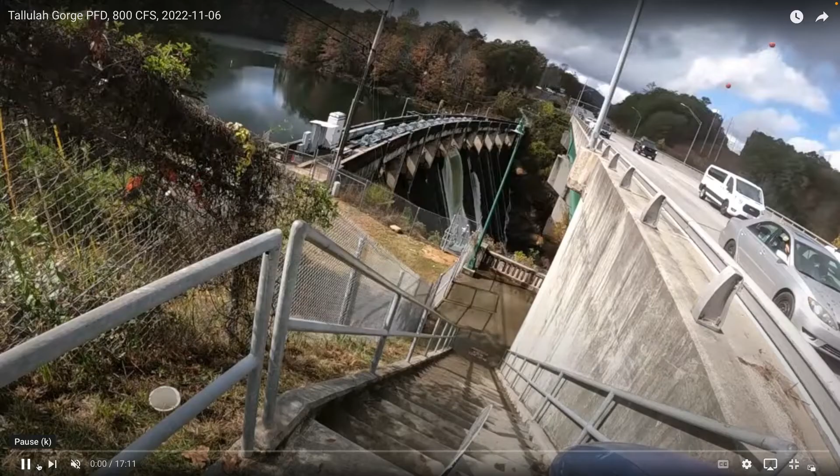If you're on the face of a wave, the water's coming downstream past you. You're sitting on the surface of a wave, pointing down the wave, and the wave is flowing past you - that's the same as the friction on the bottom of the boat, like if you're skiing. Your weight vector is directed down the face of the wave.

The water in this case is moving instead of a static mountain that you're snowboarding down, and it's providing that force against you. If you're not moving physically relative to space, there's no air resistance as there is for skiing, but those are the forces that are balancing.

So as I say, open channel flow is not so relevant for the things that we do in the 4 programs represented here: mining, petroleum, energy, and environmental systems engineering. Certainly external flows in week 12 and pipe flows are by far the most relevant to what we do, both for pipes as in drill holes and also as in porous media capillaries, representing that.

So anyway, that's where we are. I can't see my cursor.

And so the final one to show is, I guess it's standing wave, hydraulic jump.

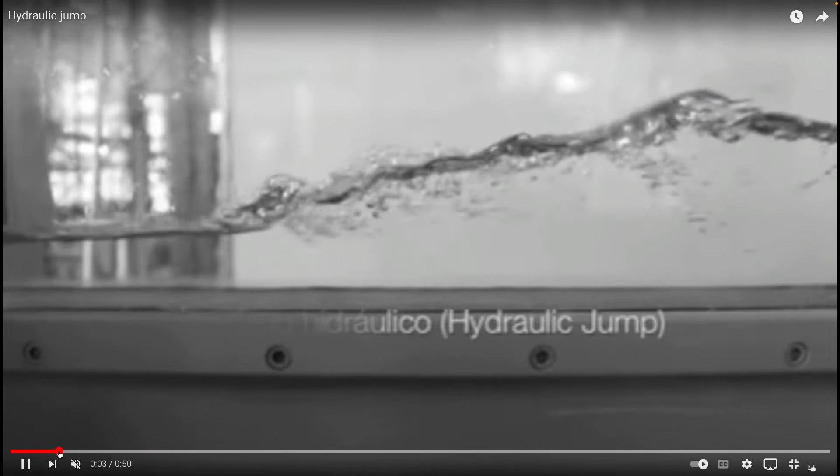So that's kind of the view of what we'll deal with in this class for this last week, which we are together for.

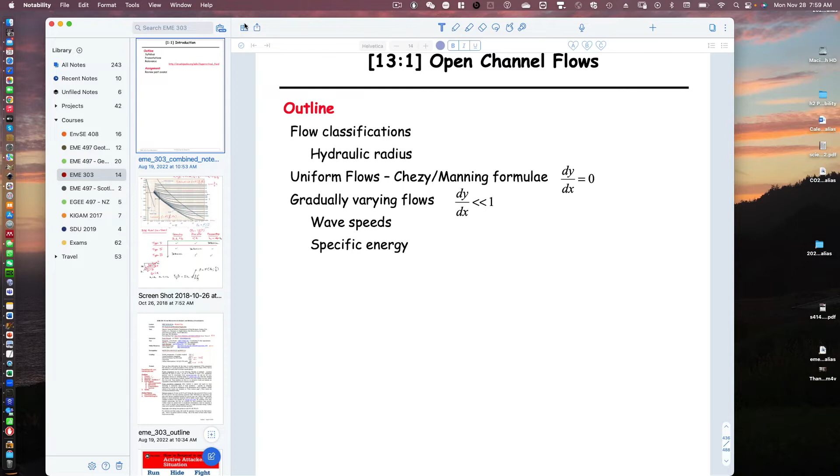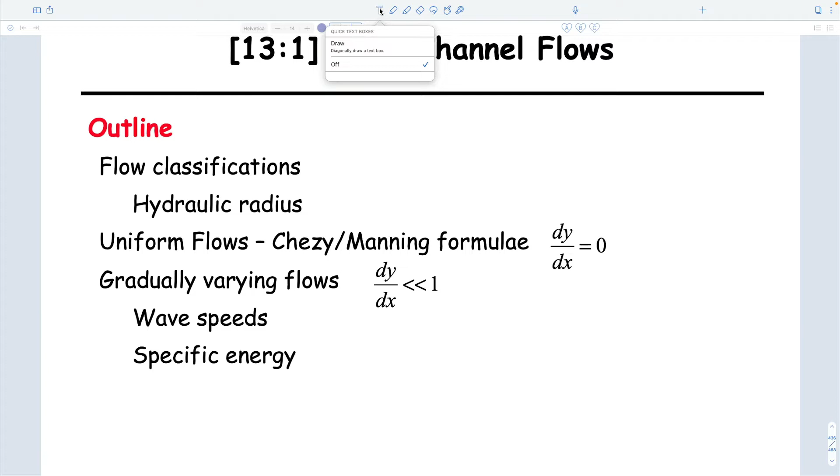So I'll go to this, and I'll go to this. I guess I have to get used to doing this again. Oh, I didn't want to do that. Okay, yeah, I thought it was me. Greetings.

So made the case that we're talking about open channel flows. We've talked about flow classifications. We made the case that it can either flow very placidly, like the rivers we're used to around here, where the cross-section area flow doesn't change much as we go downstream, or it can go in these so-called gradually varying or rapidly varying flows that we just saw for the hydraulic jump. So we'll talk a little about flow classifications.

We'll define hydraulic radius to supplement what we already know about hydraulic diameter. And today we'll really only talk about uniform flows. Uniform flows are the kinds of flows we get if there's no difference in cross-section between upstream and downstream. Then we'll move on to talk about more complicated cases.

We won't talk about that today. We'll talk about flows where the cross-section does vary between upstream and downstream.

I was sitting on my own at 7:45 before the first couple of guys turned up. So thanks for coming out as we roll these things up again.

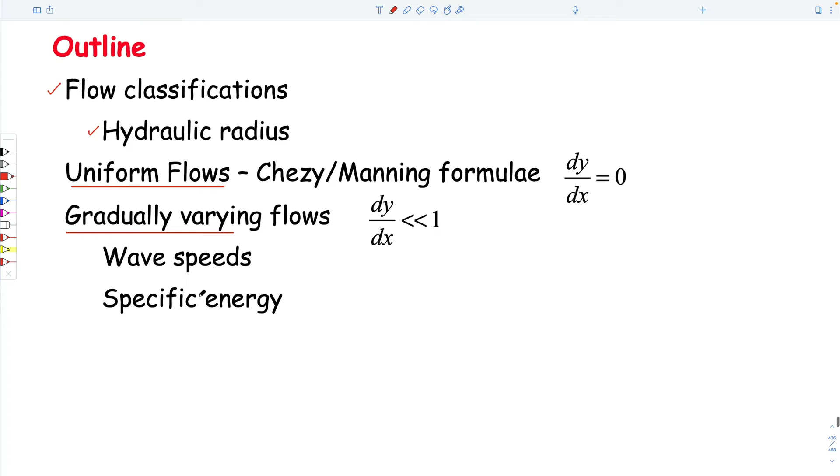And so we probably won't talk about gradually varying flows at all. So the essence of what we'll deal with is open channel flows. As we've done with lots of things, it's probably useful to recap, and I think it is specifically for this last of our three topics. So that's what I plan to do first.

So we'll put this in the context of everything we've talked about so far in terms of practical matters. We talked about fluid properties. We talked about fluid statics at a point and pressures on structures through week 3. Weeks 4 and 5 were Bernoulli, where there's no frictional losses in the systems. Then we talked about 3 forms of conservation: conservation of mass, conservation of momentum, and conservation of energy. Conservation of momentum was just F equals ma, and Bernoulli defined in a generic sense. Conservation of energy is when we have frictional losses in the system that we have to account for.

And then the pragmatic part of our class was weeks 10 and 11, losses in pipes, week 12, losses in external flows, and now losses in open channel flows. So putting those three things into some kind of framework so you can see exactly what's going on, if we talk about them in turn...

We had pipe flow with some velocity between upstream and downstream. If the section stays the same, then those velocities are the same. The whole characterization of that behavior, which you know well because I think you had it on one of your tests, is this so-called Moody chart, which varies between the different regimes. You know this - you can even tell me what the axes are of this. This is friction factor, which is drag.

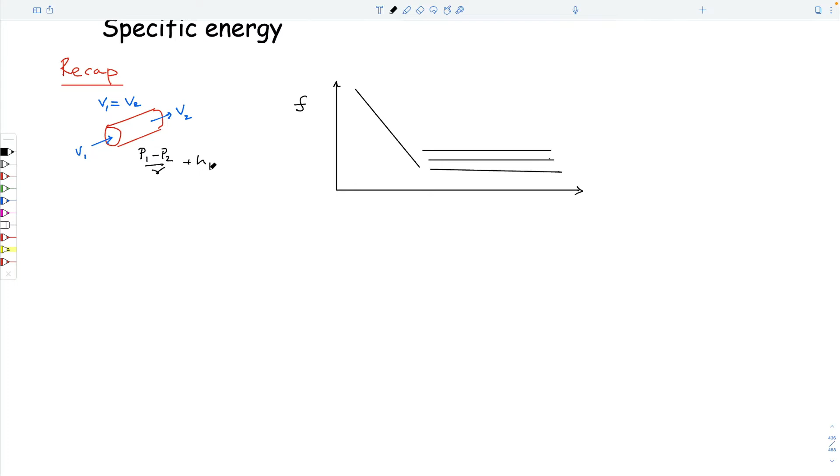We know that in this particular configuration we'd have something that looks like P1 minus P2 over gamma plus HP, equal to the sum of friction factor, length over diameter, plus whatever the flow velocity is. And we can divide it between these, and I'll try to do it on a common framework.

The Reynolds number controls the flow. We have this break-even point around 2000. The Reynolds number is defined in terms of a diameter or a hydraulic diameter and a viscosity. These values are for roughnesses of the pipes, so epsilon is just this height here, and diameter is obviously the diameter of the pipe. You know all this.

We have these two regimes, laminar and turbulent, and you know physically what they are. We know if it's a circular pipe, the friction factor is 64 over Reynolds number. And we know here that the velocity is proportional to 1 over the viscosity. I guess here the velocity is proportional to the roughness, but it's not proportional to the viscosity in any way. It's really the roughness that's controlling this, right? It's not the viscosity in this particular case.

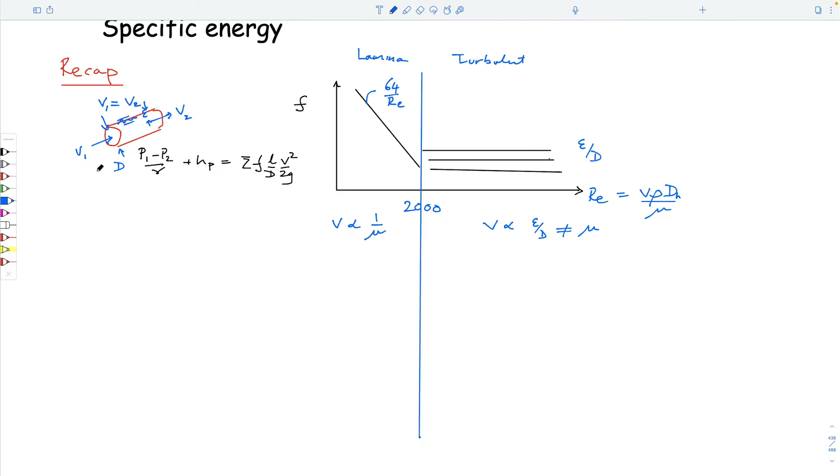And so we know how to use this to get solutions in a pipe. If we look at external flows, we could look at exactly the same geometry. I'll draw it again, but it could be a blunt-ended pipe in this particular case. So it's not flow through the pipe.

I suppose the difference is that for pipe flow, we're interested in the force exerted by the pipe on the fluid flow in controlling its velocity. On external flows, we're more interested in the influence of the flow velocity, say on, shouldn't use this, but I will use it, this is uppercase D for drag, a drag force, right?

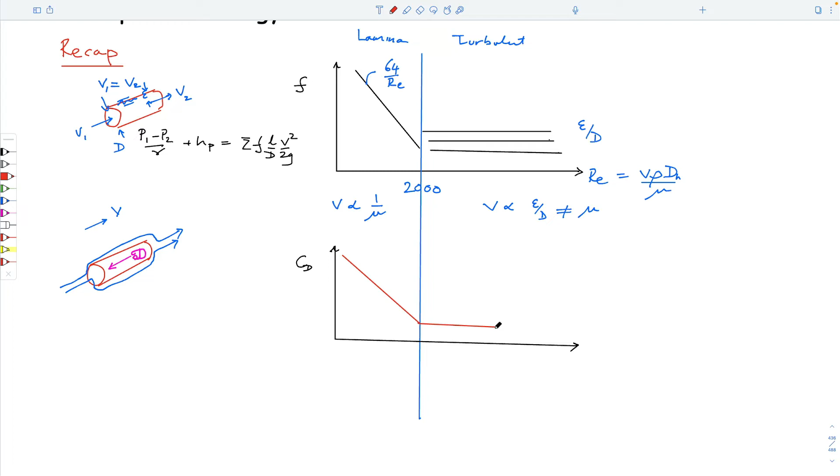And we know that we have a similar geometry. Actually, I could copy it from below, but let's draw it separately. It looks exactly the same. I suppose the figures that we've looked at would look something like this, and we've talked about why this is for a sphere. This is coefficient of drag, equal to, I think, 24 over Reynolds number.

So you see a direct comparison with this. We know that we can calculate the fact that the coefficient of drag, or the coefficient of lift—they're just in different orientations—is equal to this squiggly d, a drag force, divided by a half rho v squared times area. This is the kind of cross-sectional area that the fluid sees as it hits this.

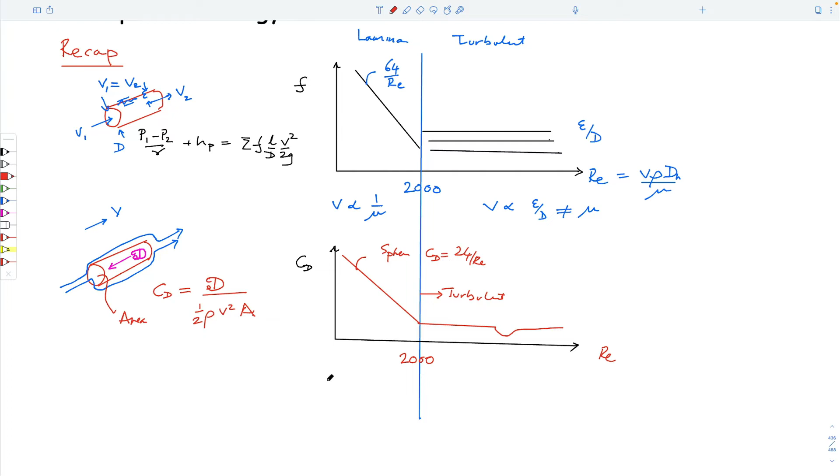And again, the same behavior, this is something like 2000 of that order, this is Reynolds number. Yeah, again, this is turbulent. And again, you see that the coefficient of drag here is proportional to viscosity, it changes with Reynolds number, or 1 over viscosity, it doesn't really matter. I guess the Reynolds number again is defined in terms of a velocity, a density, a characteristic dimension, and again the viscosity of the flowing fluid. And again, this is 2000.

Yeah, and again, I guess this is written in terms of a change in pressure over a unit weight, equal to the squiggly d over a, which is a force divided by area. So this is a stress, multiplied by 1 over gamma. You can think of it in these terms: the pressure drop between the upstream face and the downstream face, divided through by something, has to be equivalent to the drag force divided by the cross-sectional area.

You can do a guillotine through this as a free body and look at the forces pushing this through, making it stay static by the fluid impinging on it. It's the same as the truck at San Francisco Airport being blown off the tarmac by the 747. The force applied here has to be balanced by the force that's being applied to the structure. So that's the definition of drag.

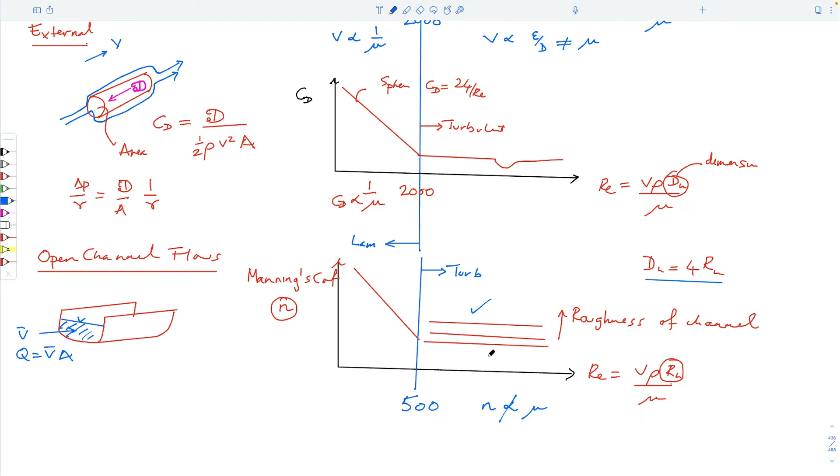And so the expressions that work out for open channel flows are always in the turbulent regime, characterized by this behavior. The Manning's coefficient is not proportional to viscosity - it doesn't change with viscosity, given that this relationship, if we drew it out, is horizontal. So the Manning's coefficients are just numbers we'll see later: 0.01 for a concrete lined channel, 0.001 for a glass lined channel, etc., if such a thing exists.

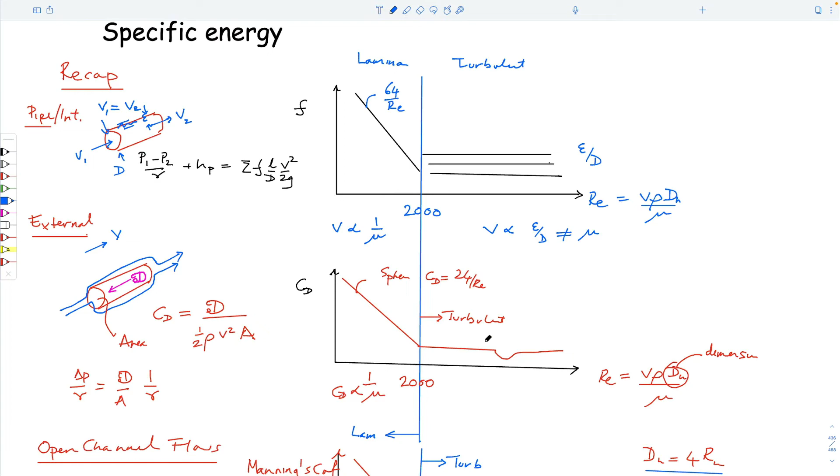And so that's what we'll talk about today. That puts it all in context of what we've seen for the last 3 weeks - weeks 10 and 11 for internal flows, week 12 for external flows, and now finally open channel flows. So that's what we'll talk about today. I'm just going to use the notes which I have rather than scribbling too much down.

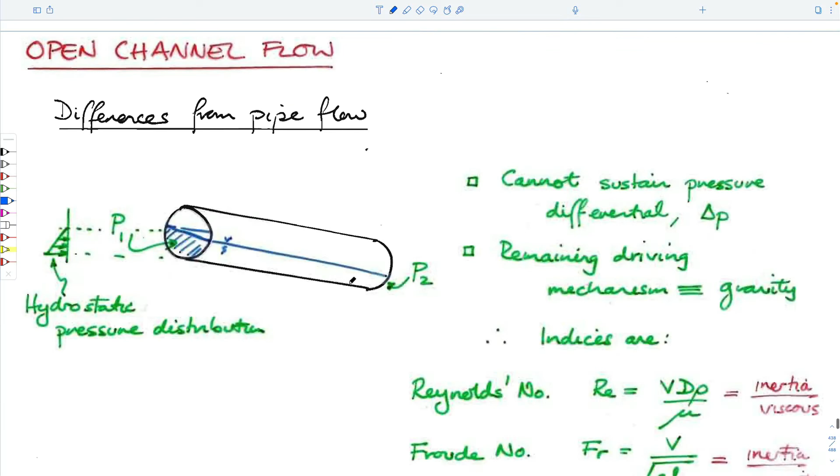Of course, open channel flow can be kind of like pipe flow, but the main difference is if you have stuff going down a pipe and it doesn't fill the whole section, then it really is an open channel flow, even though it's not open to the external world - but a culvert would be open to the pressure. So the idea is that the pressure from upstream and the pressure from downstream short circuits in the air because it's such an easy conductor.

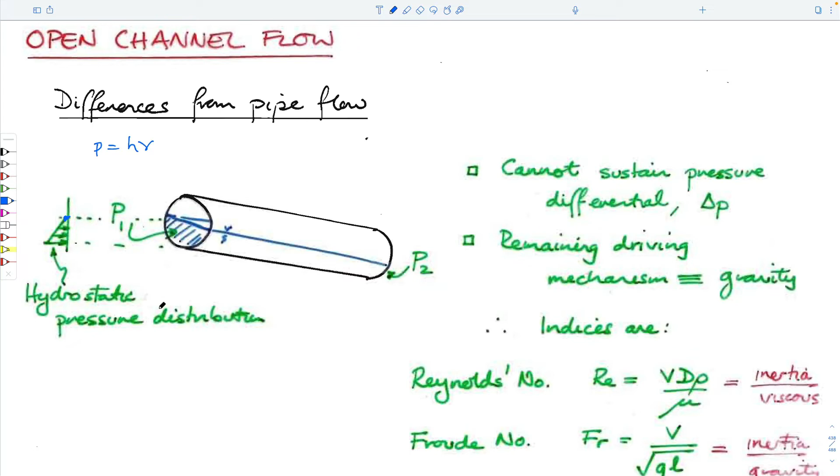So the pressure you have in the fluid can't be built up above a free surface - zero pressure at the atmospheric pressure at the surface, and then linearly varying with depth, where this would be P equals H gamma, right, as you go down. It would be the normal expression for a static fluid.

And so even if it's in a pipe, then the essence of open channel flows is that it's not being driven by a fluid pressure from upstream to downstream, but the only force that's driving flow is gravity. So the only thing that matters is really what the gravity force is, and it's going to be the inclination of the pipe.

So when we looked at the people surfing West Virginia, they're sitting on the face of a wave. The wave's going up underneath it. There's drag on the bottom of the kayak, on the boat, and there's their gravitational vector moving down, and the two are in exact balance. And so it's the same as ocean surfing as well - you're moving down, the wave's kind of moving up underneath you, so it looks like you sit in the same portion on the wave as it moves into shore, I guess, and carries you with it.

And so there are two dimensionless numbers which are important to us. One we know quite well - it's velocity, could be a diameter, and a density, and a viscosity. But the other one we haven't said much about is the Froude number. We know that the Reynolds number is the ratio of inertial to viscous forces.

And this one we've seen before, because we know that the celerity, the wave speed, is equal to the square root of gravity times the depth of the flow. We talked about this in our first week here. So surprisingly, if we know the depth of the ocean and we know what planet we're on, we can always calculate the wave speed - the natural wave speed of a tsunami or any other wave.

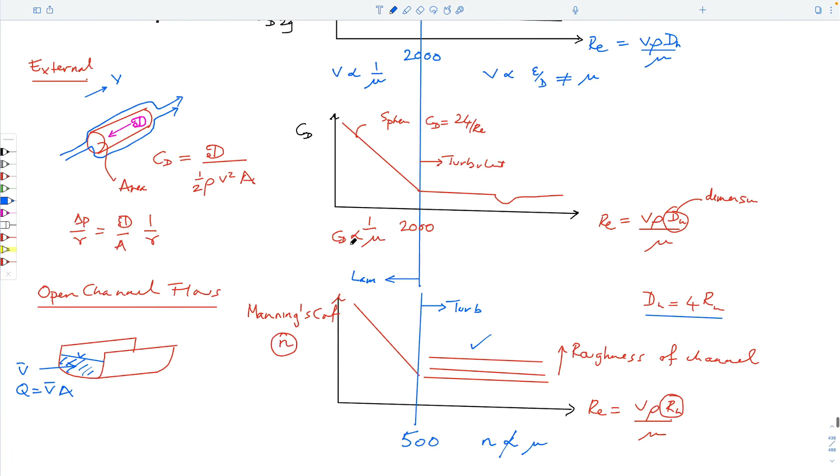We've made the case already that the number that controls the flow regime—the other thing we could look at here is what makes these things different: if this is a sphere traveling through the air, what's different between these two regimes is that the Reynolds number takes care of this creeping flow regime where it hugs the system, and when it's turbulent, we get this vortex street forming at the back. So no longer does it hug it. This is the same—you can think of it as viscous flows.

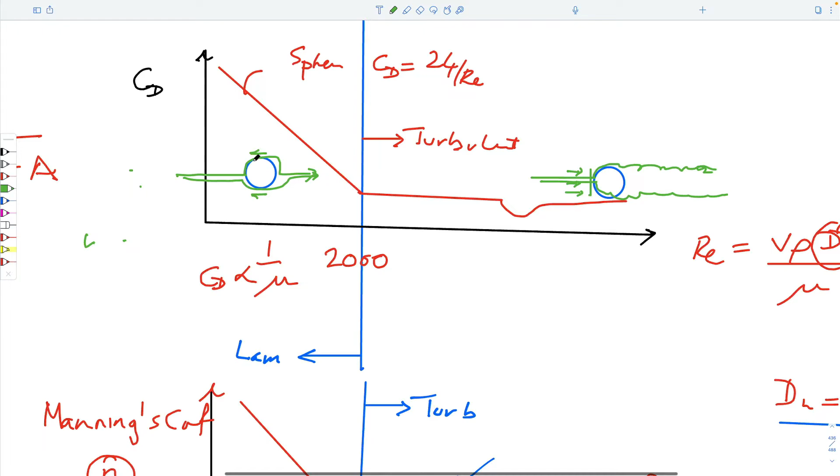If you blew this up, this would be a drag force applied to the side of this thing by the viscosity. This is much closer to the truck on the apron at San Francisco, where it's getting hit by a whole bunch of velocity from the jet engine. It's hitting it at some velocity, and you're killing that velocity by the stagnation at this front part. The force applied from this is by killing the velocity of the fluid with some density, which is why it doesn't vary so much with viscosity, why this line is flat. And here, the force applied is due to viscosity. So that's the reason for the two regimes.

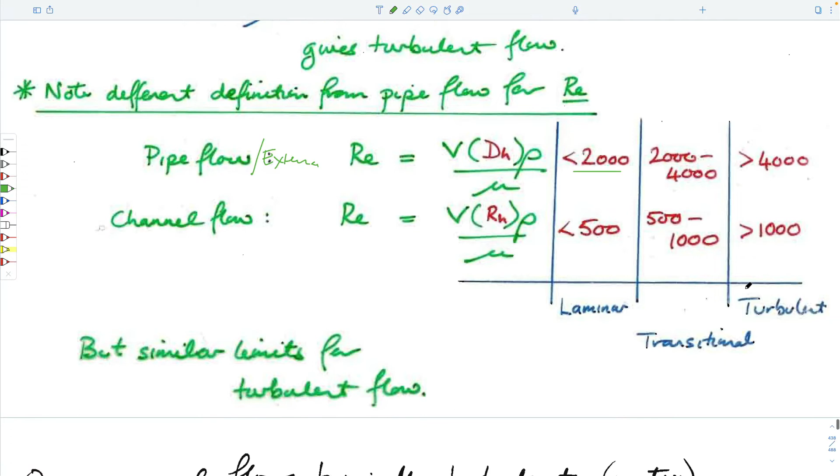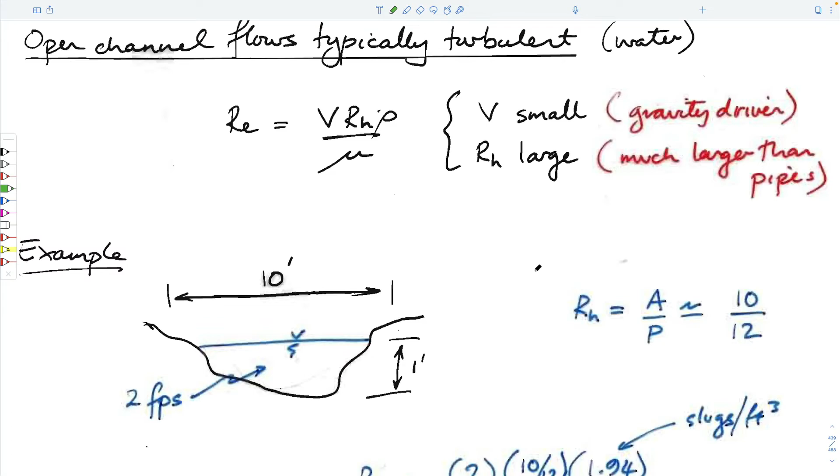The same applies for this—I guess we're just making the same case, that for pipe flow, and for external flows as well, it's always been 2000 for laminar flow, a transitional flow between 2000 and 4000, and then turbulent flow beyond this. If instead of using diameter we used hydraulic radius as our index, it turns out being a factor of 4 less, and it just follows through, but the same kind of ideas. We're almost always in this regime to the right side of the laminar turbulent transition. It's not a sharp transition.

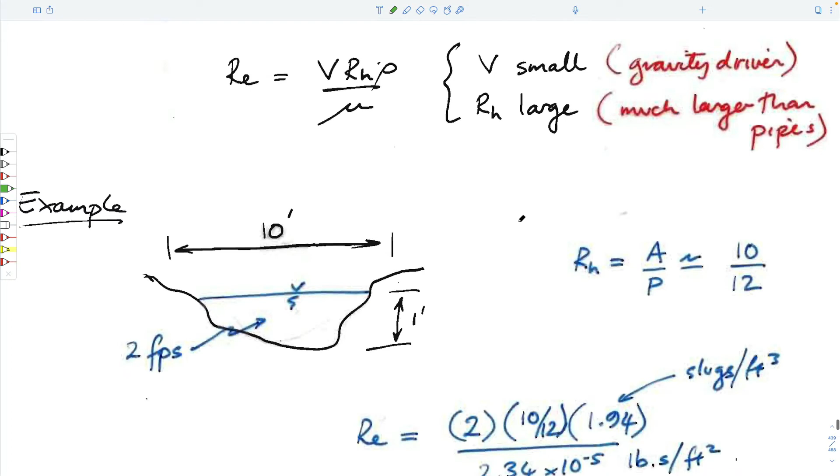We've said before that there's some kind of area in here, which I guess would be this 4,000-ish. It's pretty small because this is always a log figure for us—in terms of log-linear figure. If we do the calculation for the Reynolds number for this, take a velocity—I guess this must be 2 feet per second, in terms of slugs per cubic foot. I'm not sure exactly why I'm doing that. I guess we could do it in SI units. Why not? 2 feet a second is 1 meter a second.

Hydraulic radius is going to be, in this particular case, the area divided by the perimeter. 10 feet is equal to 3 meters, 1 foot—well, let's make it 1 meter, just because it's not 1 foot, but makes it easier. So if that's the case, the hydraulic radius is equal to the area, which is 3 by 1, over the perimeter, which is going to be 1 plus 1 plus 3—summed up, not the product. So 1 plus 1 plus 3 should be 5.

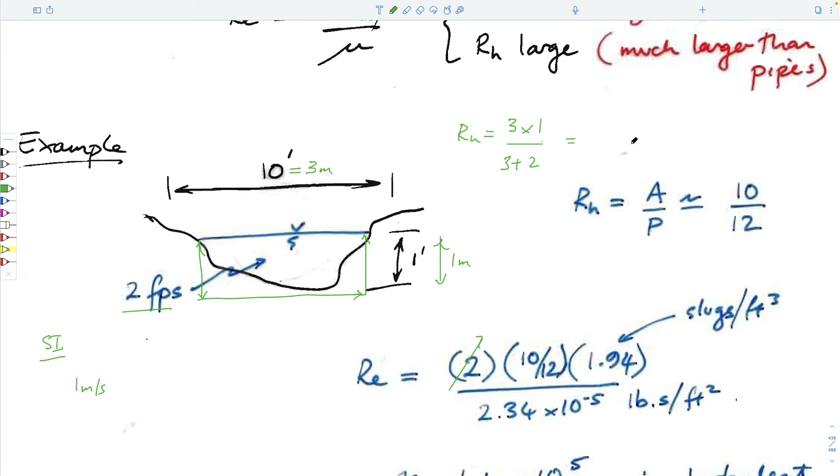So 3 divided by 5, which is about a half. That was 3 over 5.

So velocity, hydraulic radius, density is 1,000 kilograms per cubic meter. And if it's water, then we all know these numbers.

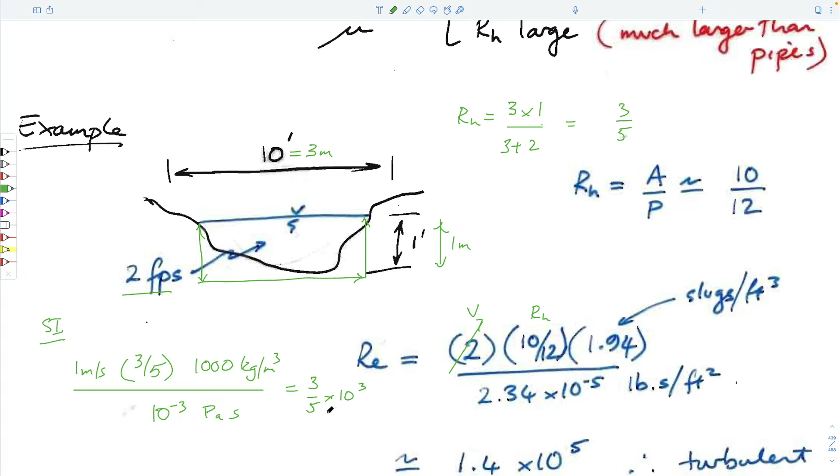And so that should come out to be, this is 10 to the minus 3, which is 10 to the 3. This is 3 over 5 times 10 to the 3. Yeah, well I said it should be 10 to the 6 - sorry, someone should correct me, right? So it's huge, it's 10 to the 6, so 3 and 3. So it's a big number, clearly much larger than 2,000.

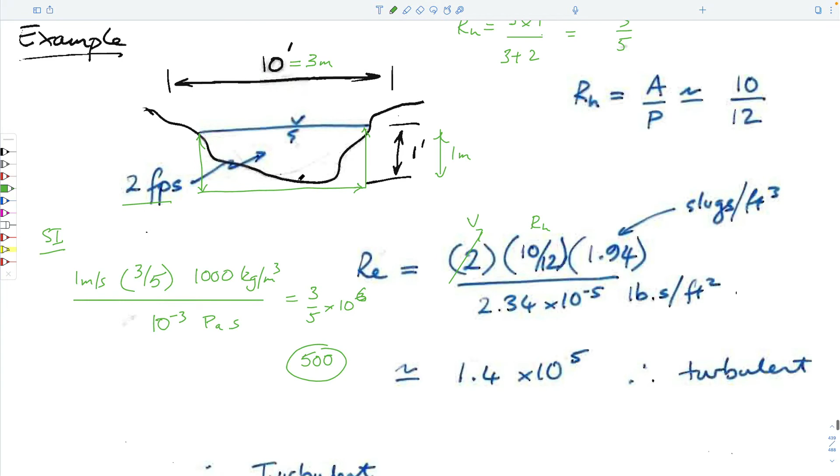And in this case, it only has to be 500 as the threshold. So for a very modest flow rate, but a very wide section, it comes out to be almost always turbulent. So the behaviors we have in terms of flows are classified according to these classifications.

So the one we'll talk about today is uniform flows. Then gradually varying flows, and rapidly varying flows.

So that's the shorthand we'll use. When we're looking at flow within a channel or a ditch, the main aspect is that the upstream cross-section and the downstream cross-section are the same, as opposed to gradually varying flows where the upstream and downstream are not the same.

And for rapidly varying flows, that was our first case. If you were here early enough, we looked at a hydraulic jump. The water goes at some high speed over a small cross-sectional area, and then downstream it goes much slower over a much larger cross-sectional area, because it satisfies continuity - the volumetric flow crossing each of these gates is the same.

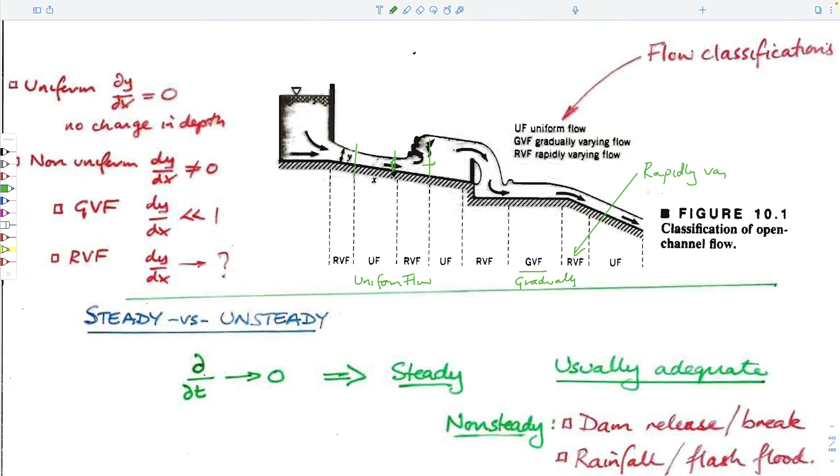There's no accumulation, so we have to figure out exactly why the water decides to be in those two different configurations and what the reason for that is. That's kind of the challenge we have.

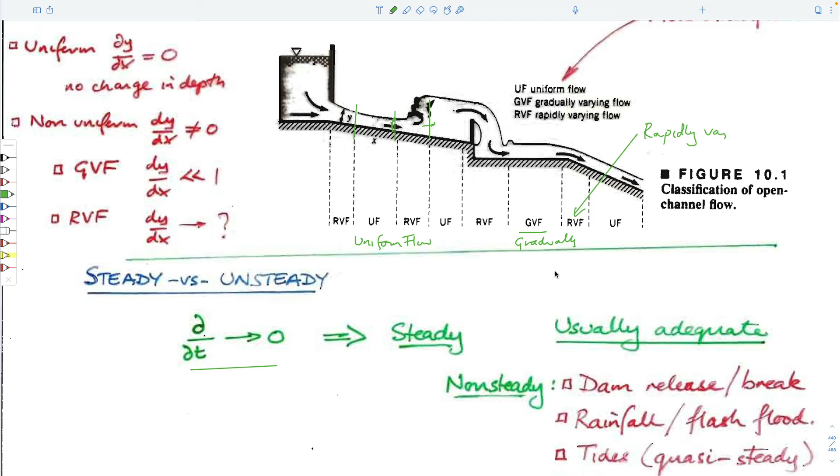We'll only talk about steady state flows. In other words, if we look at this picture of these flows now or in 10 minutes, the water levels and the profile from upstream to downstream would be exactly the same, even though for a piece of water coming out here, you'd see different velocities as it goes downstream. There are lots of non-steady cases we could deal with, but we won't.

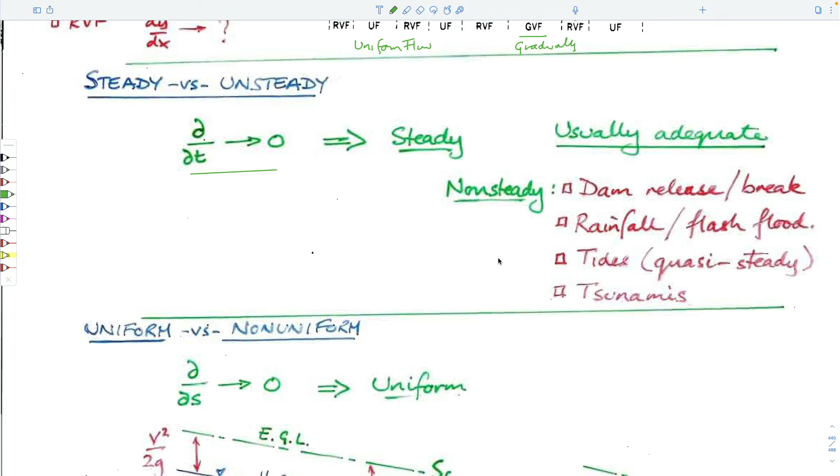The essence of what we'll talk about today is only this one first case of uniform flows. So for uniform flows, by definition, this depth of flow upstream and the depth of flow downstream is constant.

If that's the case and continuity is enforced, we know that v squared over 2g at each of these locations, upstream and downstream, are the same. We've talked in terms of the energy grade line and the hydraulic grade line before.

Hydraulic grade line is just the pressure. You can think of this as the pressure head, and this would be the elevation head, if you wanted to think about it that way. So if this was Bernoulli, this would be upstream and downstream elevation.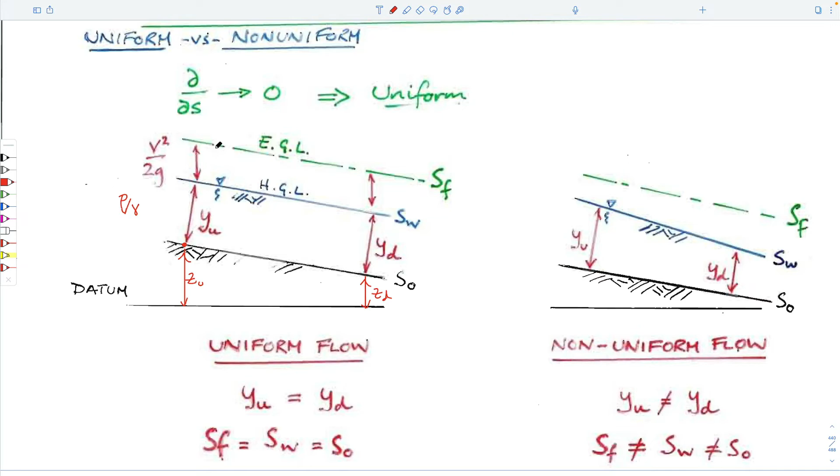This would be the upstream. Y is equal to P over gamma, right? That would be this pressure here, equal to this height, etc. And the velocity head is the amount above this.

So for our uniform flow, upstream and downstream depths are the same. By definition, upstream and downstream velocities have to be the same. And we can define the slope of the bed as being parallel to this hydraulic grade line. That's the deal here - the whole mathematical basis is that for uniform flows, the depth of water doesn't change as it goes downstream.

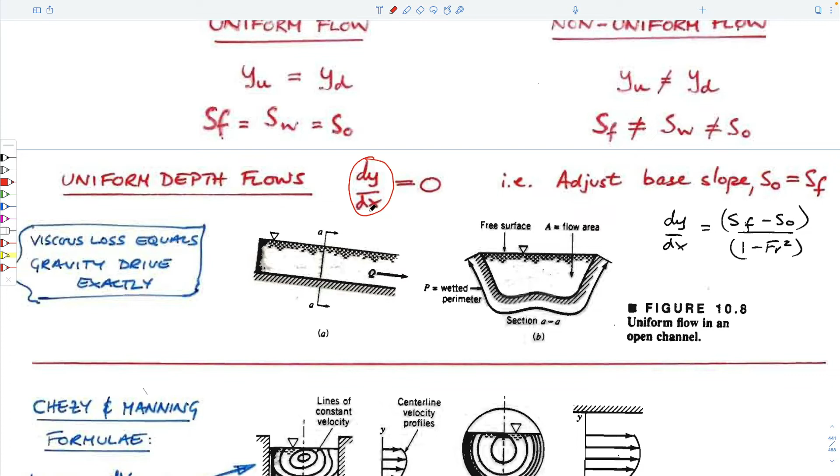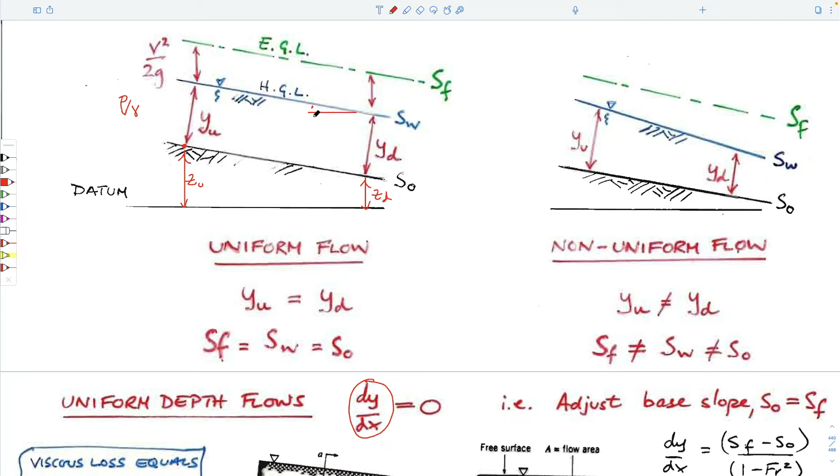That's all this is saying - the slope of the surface here, and this slope here, are identical to each other.

So the idea is that we can define a simplified form of our system. This is what the real flow would look like - a channel with flow within it, just like a pipe. If you look at pipe flow and we looked at this section vertically, it would look something like this.

Zero velocities at the boundaries and a maximum velocity in the middle. So if this was our plan view looking down on this channel and taking a section across it, the fastest velocity would be in the center somewhere. Since it has a bed and a free surface, the bed will also have maybe a zero velocity if it was laminar. But since this isn't laminar flow, there's a boundary layer here, so it's probably a small finite velocity at these walls, but certainly lower than in the center, with maximum velocity at this point.

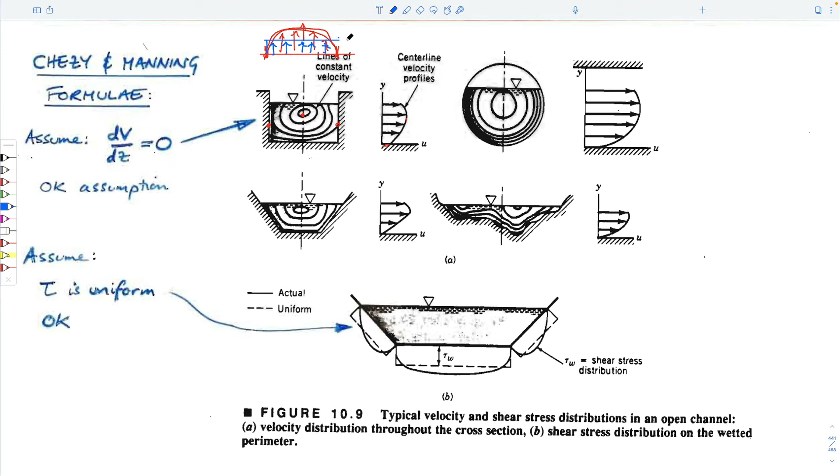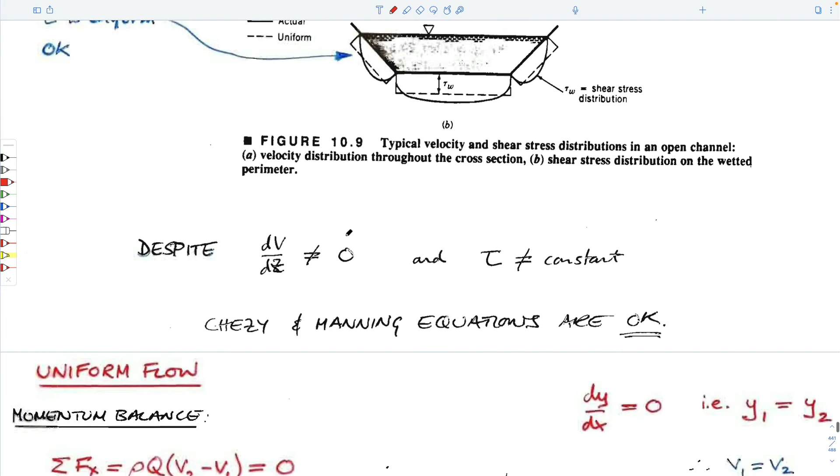So what we're going to do, rather than deal with this reality, is think of this as an equivalent uniform velocity - we've called it V bar in the past. This is the velocity we'd like to idealize, instead of this actual velocity V. With that, we can go through some relatively straightforward analysis - nothing you haven't seen before. Momentum balance is F equals ma.

We can also write it as mass times rate of change of velocity with time or space, which is equal to... and the reason for doing that is that the mass rate of flow, this is actually

m dot v, right? We know that the sum of the forces acting on the system is equal to the sum of the mass flow rates times the velocity. That's just momentum balance. So here, if we write the forces acting on the system, this density times volumetric flow rate term is just what we've called m dot. The velocity between upstream and downstream, if velocity 1 and velocity 2 are the same, then this term goes to 0 collectively, and sum of forces equals 0.

So we can take this as a free body, if we like, and we can look at the forces acting on it. The forces upstream and downstream, well, what do we say about the forces? We haven't proven it, but take it on trust. I'll use a different color.

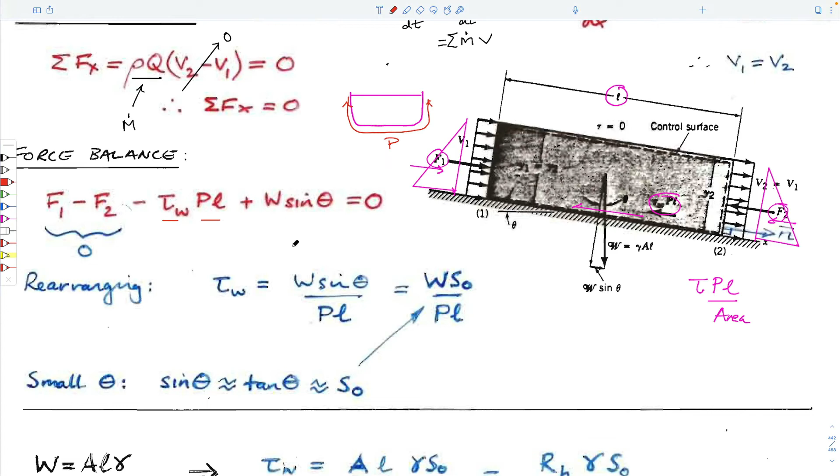And the only thing that's driving flow is the vector of this weight, which is inclined relative to this line by some magnitude, which is W sine theta, the inclination. Theta is the inclination of the bed. So this is the force balance equation which we have to satisfy, which is obviously satisfying momentum balance because there is no change in momentum in the system.

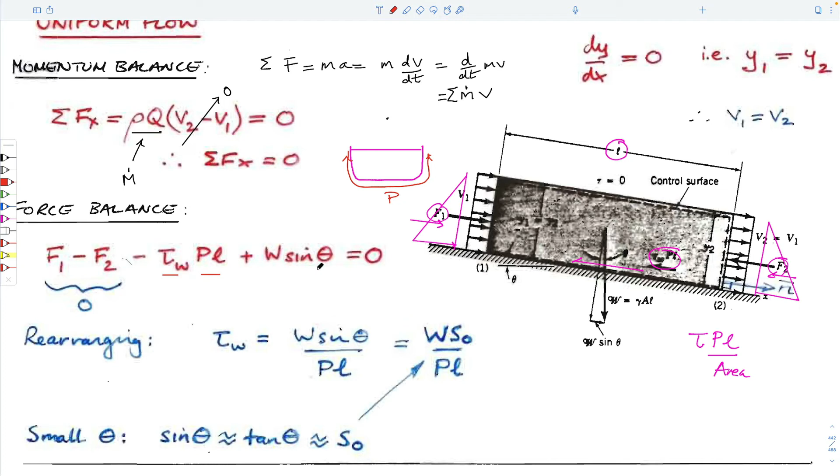So if we write this out in terms of this parameter here, we can rearrange this term here. And if we substitute the value of tan theta as being equal to S0, which is approximately equal to sine theta for very small theta.

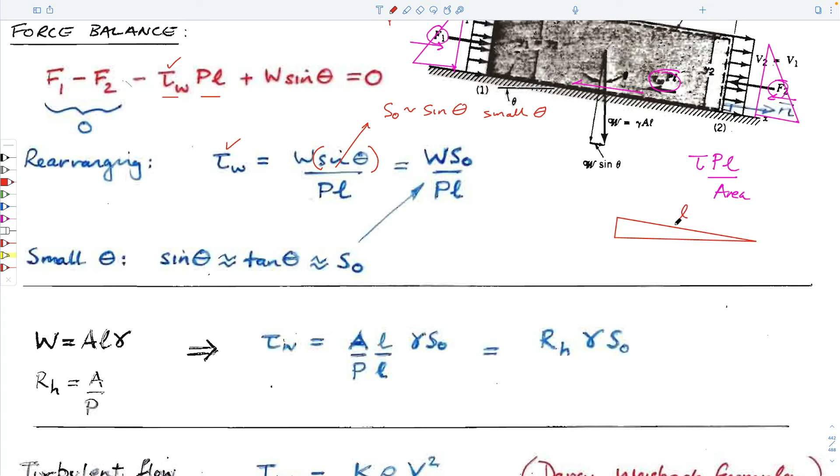So S0 is just going to be equal to, if you want to think about it... this is L and this is dz. So S0 is equal to dz over L. L could be the inclined distance, or it could be the horizontal distance, because this is so small, they're both essentially the same. And so this is a very small number. S0 is a small number, but it's equal to substituting for this sine. So all we've done is get this term here instead of sine theta.

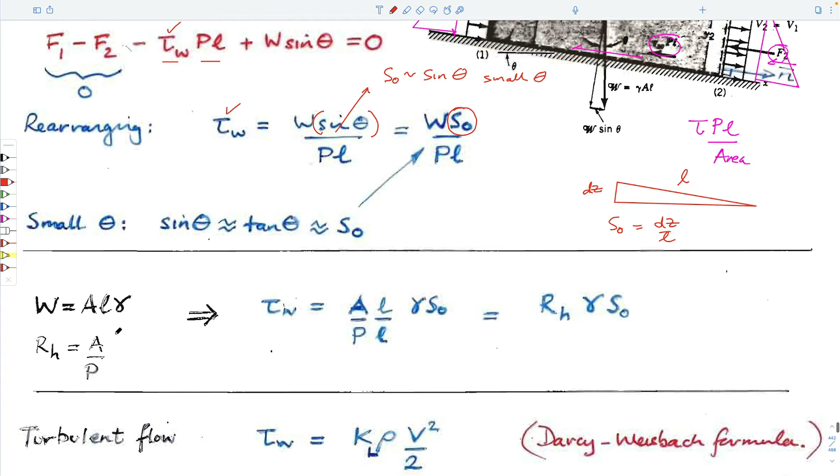We need to know the magnitude of the weight, so the weight is going to be equal to the area. Actually, why don't I do that in a different color, fuchsia, just to get fancy here. Area... and this is the length, right? I've drawn this in the wrong orientation — A is obviously downstream, and this length here is looking upstream, but you get the picture. The weight is going to be the area times the length times the unit weight.

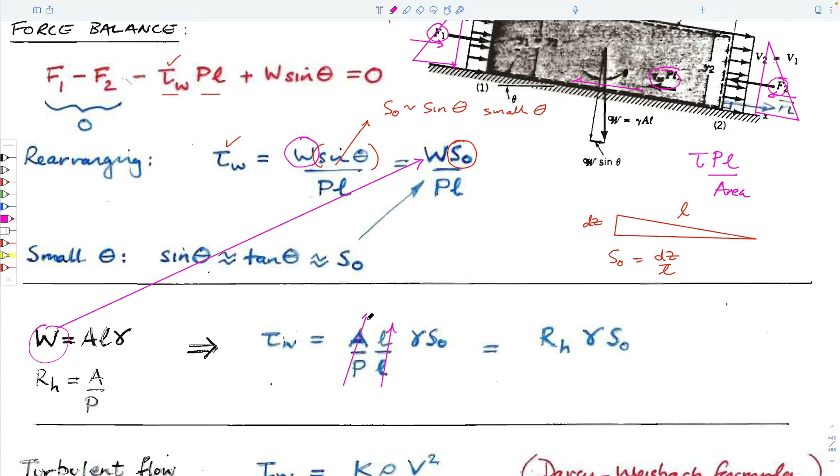The hydraulic radius is equal to the area over the perimeter. So if we substitute this here into this, we end up with unit weight. You end up crossing out the values of the lengths on the upper numerator and denominator, and we're left with an area and a perimeter, which by definition is equal to the hydraulic radius.

We end up with a straightforward expression: the shear stress applied on the bottom of the bed is equal to the hydraulic radius, unit weight, and the gradient. So it kind of makes sense. Unit weight is density times gravity, which is driving the flow since it's a gravitational flow. A steeper bed means a higher shear stress as you incline the bed more.

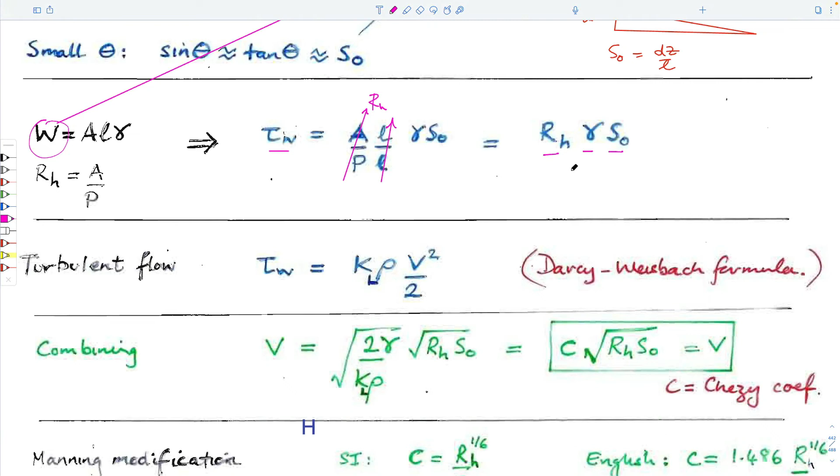We never spent much time on this, but we talked about things like Bernoulli and the energy equation, where HL equals KL times V squared over 2G. Head losses could equal a friction factor times length over diameter times V squared over 2G for a pipe, and for a fitting it would just be in terms of velocity through the fitting and a head loss coefficient. The coefficient has no units, since this is length and that's length, and it's a head loss.

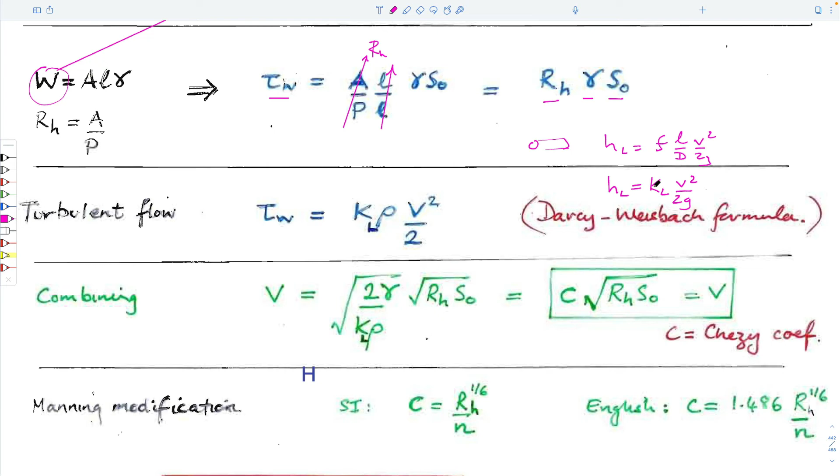This expression is basically the same as that one. It's saying the amount of loss, written as a stress instead of a head loss, is given by a loss coefficient, a velocity squared term, and the density instead of being divided by 2G. So we can rearrange this expression in terms of velocity.

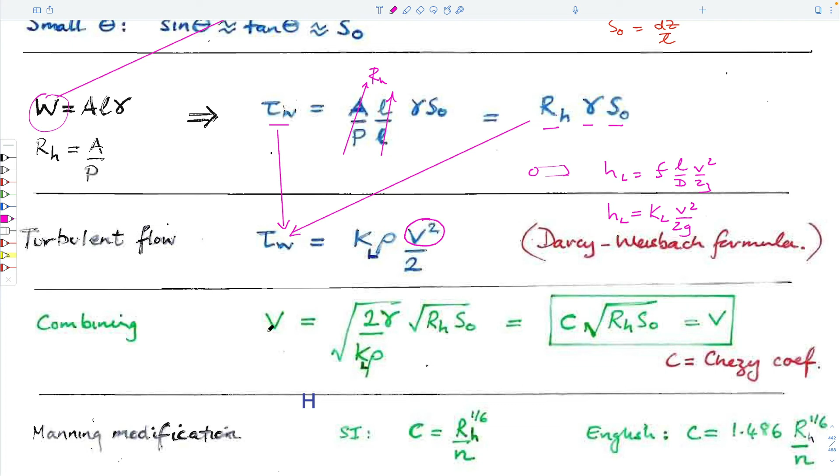We already know the value of this term here, so we can substitute it in. If we solve for velocity by square rooting, we end up with these terms, and the only important thing is this boxed equation in green at the bottom. It comes out that these coefficients would be a loss coefficient, density of the fluid, and unit weight, which includes density and gravity.

So this is a constant, and this depends on the particular channel geometry—how steeply it dips and what its cross-section looks like. We can think of this as a coefficient, the so-called Chezy coefficient, named after the French guy who developed it, multiplied by the characteristics of the channel.

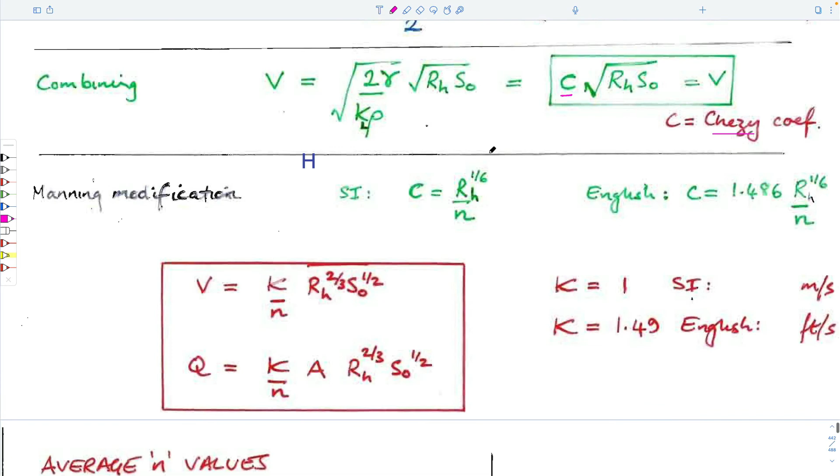You can sort out the magnitudes of this term through dimensional analysis, and in SI units this is equal to the hydraulic radius to the power 1/6, divided by the so-called Manning's coefficient, which we haven't talked about yet. So you can use the Chezy formula or the Manning formula. Manning is much easier for us to use because you don't have to do any conversion to get the Chezy coefficient.

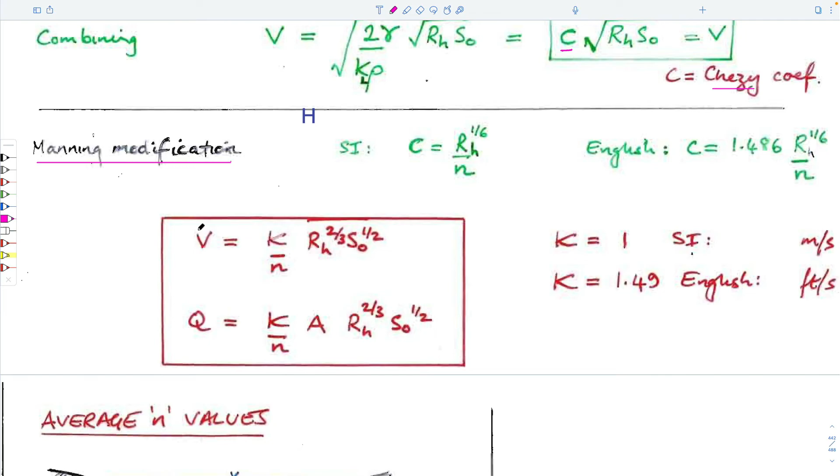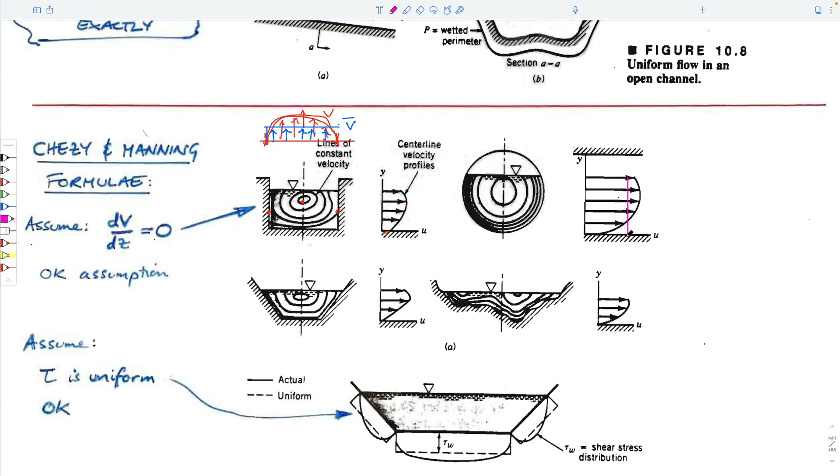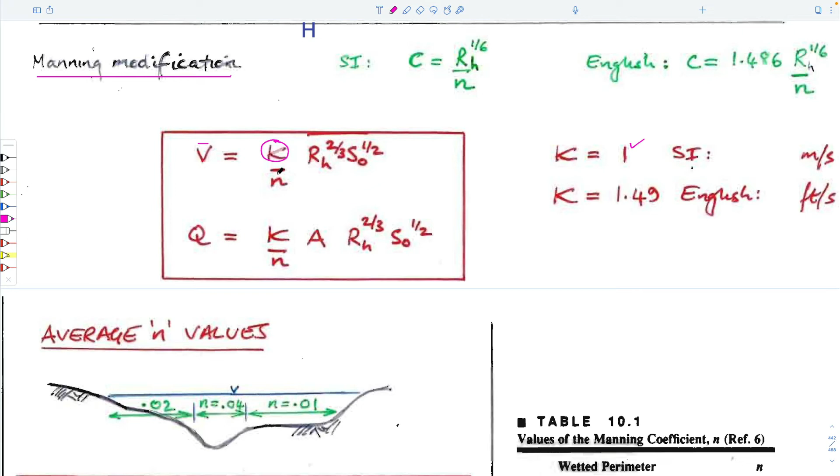All it says is that the velocity of flow in our system—I suppose this would be our average velocity, the blue one drawn up here—across our system is equivalent to a coefficient which for SI is equal to 1, and 1.49 for English units, divided by a Manning coefficient (which table 10.1 at the bottom of your screen defines), times the hydraulic radius of the flow and the slope of the bed, raised to some powers.

If we want to get the volumetric flow rate, we just take the average flow velocity times the cross-sectional area, and that's what this is. So those are the two expressions that we need.

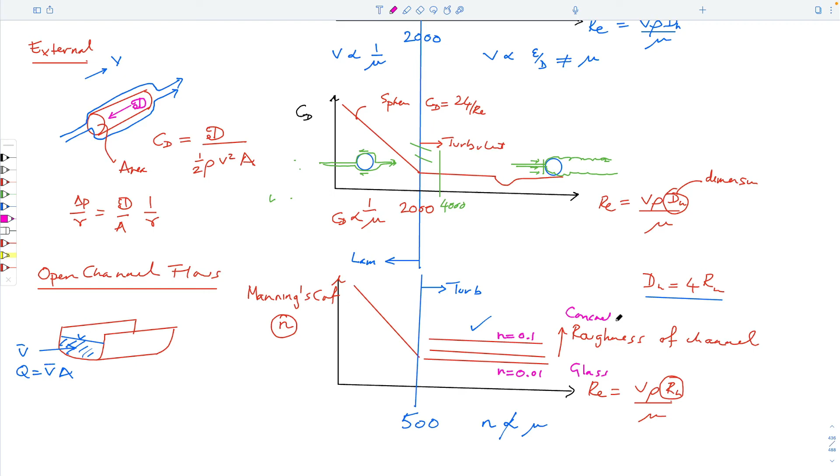For uniform flows, where the depth of flow upstream and downstream are the same, we can get away with this characterization. It's really exactly the same as using drag coefficients and friction factors in the turbulent regime, where you get a single value of n—so n equals 0.1, n equals 0.01—depending on whether it's a glass channel or a concrete-lined channel, just choosing numbers as examples.

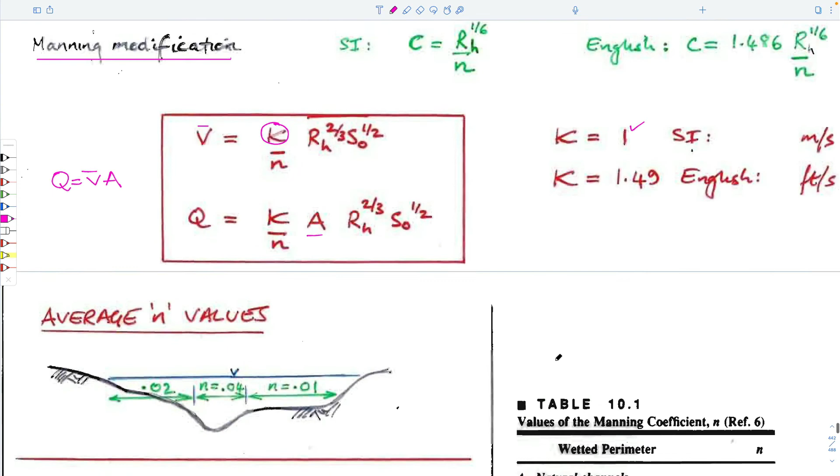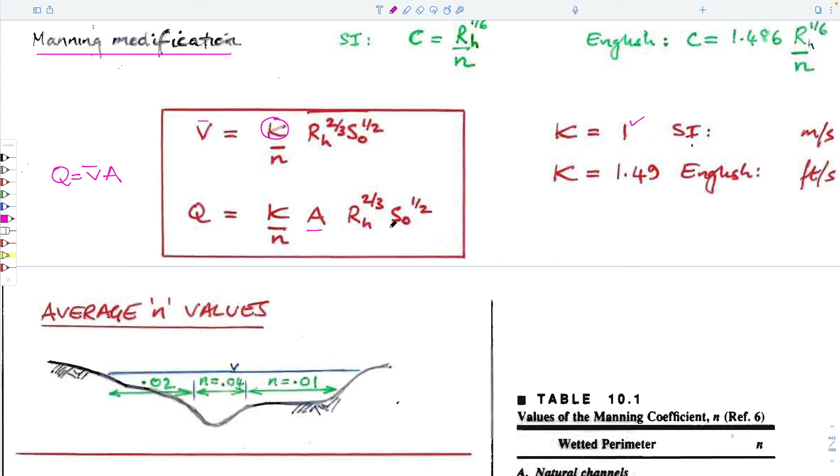That's really what these expressions are—just like the pipe flow equations, but for an open ditch. Instead of being driven by upstream fluid pressures, it's driven only by the gradient oriented in the direction of flow of the bed of the river. So it becomes a recipe to use. Manning coefficients don't depend on the fluids at all, only on the characteristics of the channel. You can think of different classifications: natural channels, rivers with floodplains where you're flowing through trees and brush, and human-made channels.

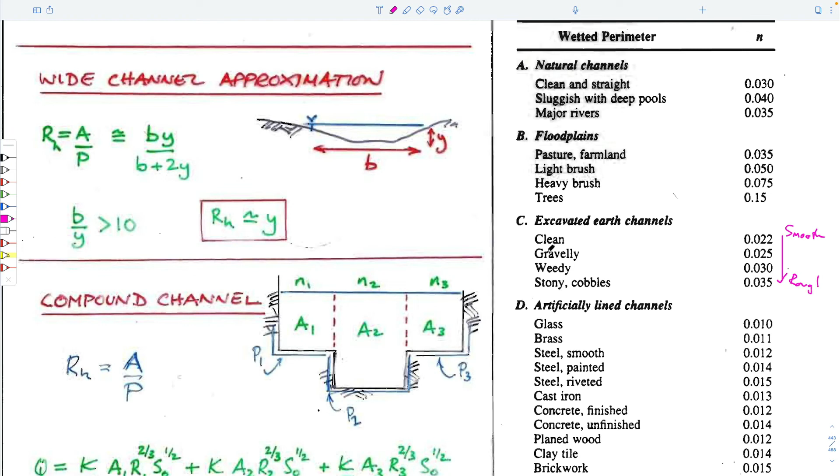The characteristic of Manning's numbers is that they get larger as the channel gets rougher. So this is smooth, this is rough, clean versus stony cobbles. I did use glass as an example, though not very many channels would be glass, but this goes from smooth to rough, and you see the numbers go from small to progressively larger values. So that's the deal, and it's very easy to use.

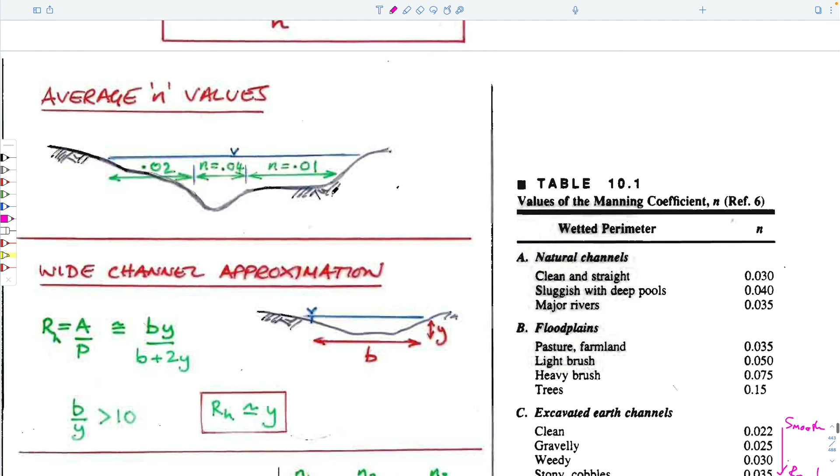It requires, of course, that you know what your channel looks like. You need to be able to go into the field, wade across the Allegheny River, and see how deep it is and how the section varies. But the idea is to get a value for the hydraulic radius, which we already know, right? We've done it already, which is area over perimeter.

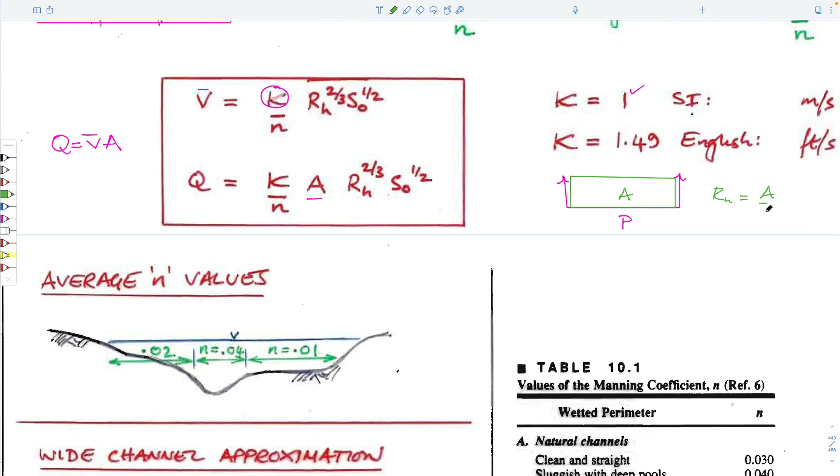So this would be P, and this would be A. Yeah, and then use a value for whatever the Manning's coefficient is for this channel. And then you have a depth. You need to know what the gradient of the channel is, how much it goes downhill over a given length. And you just need to plug and chug the numbers to get it.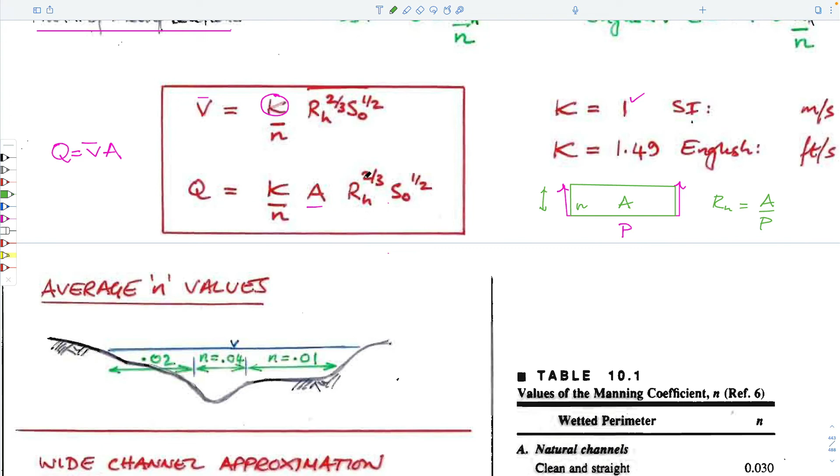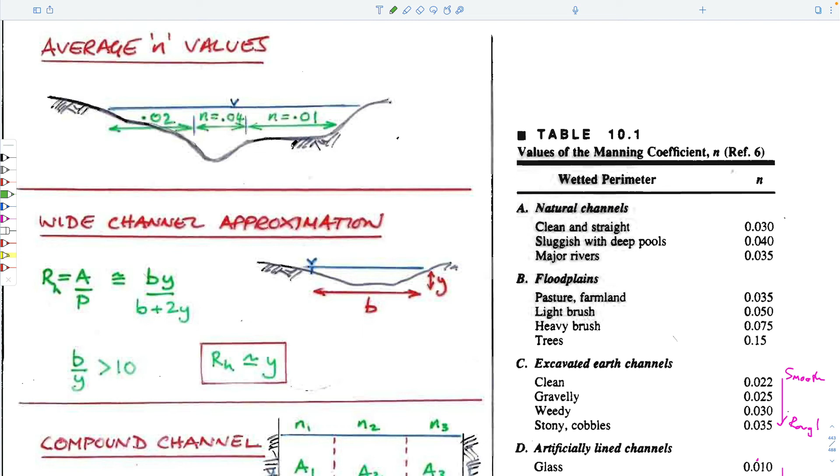The subtleties are that you might have a channel with a number of different components. For instance, your channel could be a river that's overflowed its banks, and the main river channel might have a different Manning's coefficient than the surrounding floodplain. You'd think the channel would have the lowest number and the floodplain flowing through trees and brush would have a larger Manning's number, but it doesn't really matter.

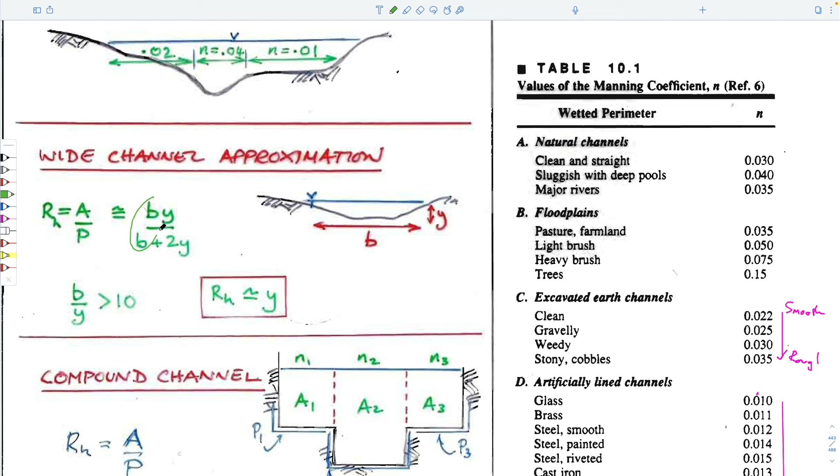As the channel gets really wide compared to its depth, the hydraulic radius reacts in a particular way. If the hydraulic radius is the width times the depth divided by the width plus 2 times the depth, then as the width gets very large compared to the depth, you're left with the hydraulic radius being equal to the depth. That makes sense, because the width cancels out both top and bottom, since b gets very large here, and 2 times y gets large here.

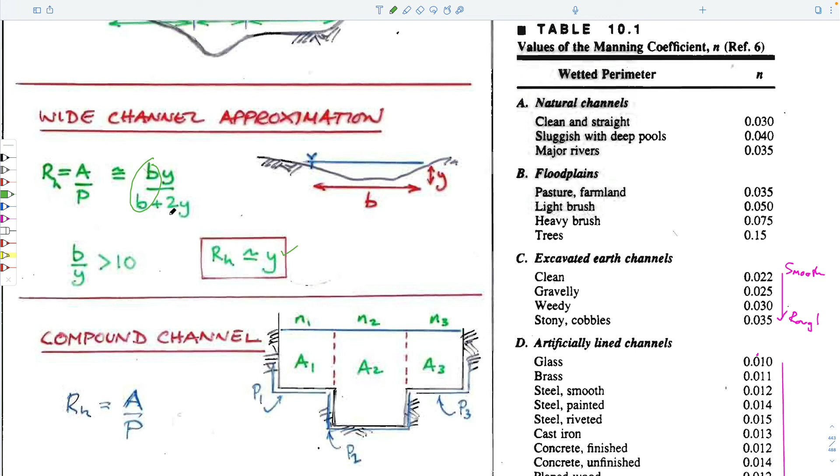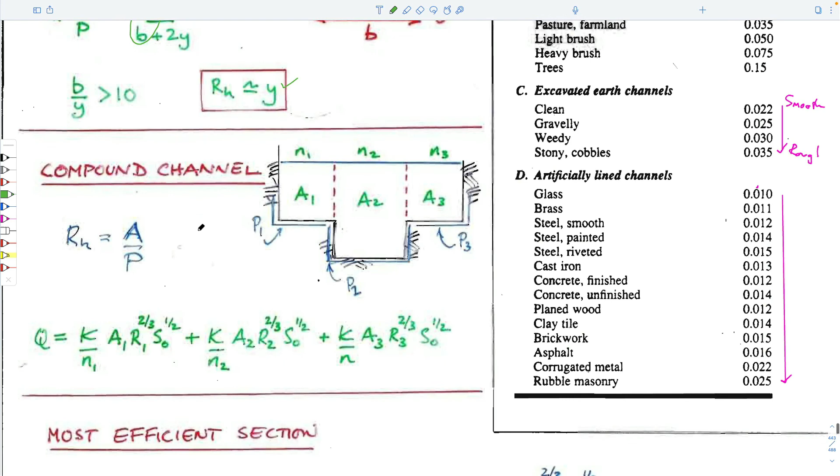If you have a compound channel, you can solve this by summing together the different flow conduits. This is an analog to our parallel flow, so you have 3 pipes in parallel. The flow across those 3 pipes has to be Q1 plus Q2 plus Q3. The head drop across them has to be the same, because upstream and downstream, in this case driven by the gradient of the channel, have to be the same. So you sum the individual flow rates: the total flow rate equals Q1 plus Q2 plus Q3.

Q2 would be the flow rate physically into the page as an arrow. The only thing you have to remember is that you need to use the appropriate Manning's coefficient for that channel, the appropriate K value. For SI units, this is always equal to 1, and we'll only work in SI units. You also need the cross-sectional area and the appropriate hydraulic radius.

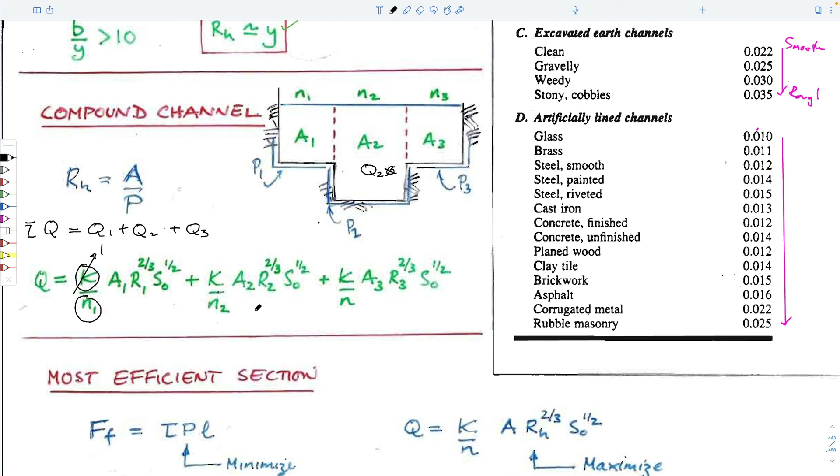The hydraulic radius for this, the important thing to remember, is that the perimeter of this section would be this length plus this length, not including this part here, since you're not going back up. The reason for that is because as you cross this boundary, water meets water moving together, not stagnant water against moving water, so there's no drag along this interface. That's why you only use the wetted perimeter of the solid, not the wetted perimeter of the interior.

So the hydraulic radius 1 would be equal to A1 over P1, this area here and this perimeter, which would only be these 2 legs, not this part here. If you can do that for one of these, then the perimeter for this one - I tried to change the color but it didn't - P2 would be this part here, wetted only. You can think of it as the wetted perimeter, and P3 would be this part.

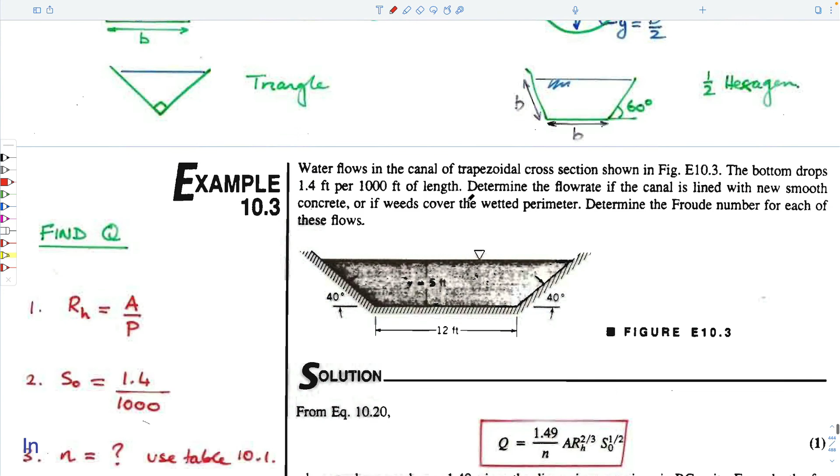So that's the only important thing to realize, I suppose. Some examples - I'm not going to do the examples because I think you can see those. There's always one of these questions on the test, and it's the recipe. It's pretty straightforward, but you might want to look at these.

So we can also talk about the most efficient section. The most efficient section for a given gradient, so if the gradient's constant, the most efficient section will be one that has the highest hydraulic radius for the cross-sectional form. If you find a form or cross-section which has the highest hydraulic radius, then by definition you have the highest flow rate for a given gradient, and therefore you have the most so-called efficient section.

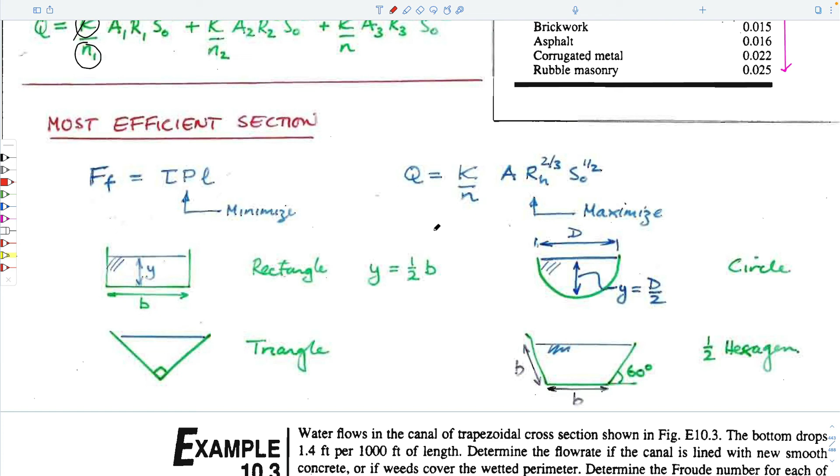So it turns out that the most efficient sections are: for a circular one, if it's bank full to the top of the radius deep, so half diameter deep. Instead of only partly filling the section, this would not flow with as high a velocity as being full. The most efficient rectangular section is the depth equal to half the width, which is a little bit like a circular pipe, but without rounded corners.

A triangular section has a right angle at the bottom, 90 degrees. And the half hexagon, if it has angled sides, the sides are angled at 60 degrees, and the length of this side at 60 degrees is equal to the width of the bottom. If you know that, you'd be able to calculate what this particular part would be just from these angles. So that's it.

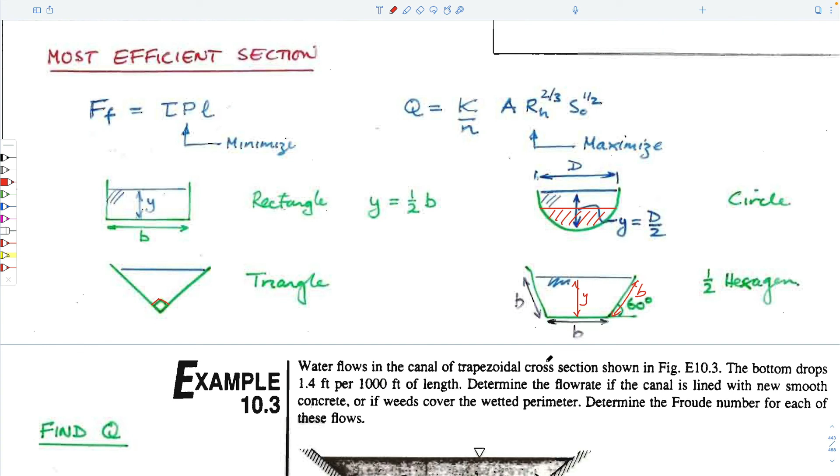That's it. So the only thing that's important from what we've talked about today, not the derivations, but these two formulas, the Manning formulas. You get the velocity, which is uniform across the system because we assume it to be that case, and it's given by a Manning coefficient, a hydraulic radius, and the inclination of the channel. If we want to get the volumetric flow, we just multiply it by the cross-sectional area, and you have the same formula.

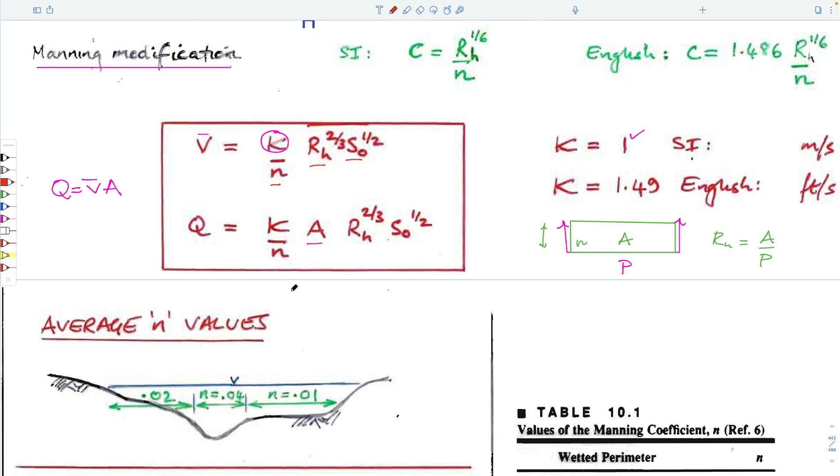And there's an example that does similar things, and a composite example as well, so I don't think we need to go through those. So that's it. Any questions? No? Pretty straightforward, isn't it?

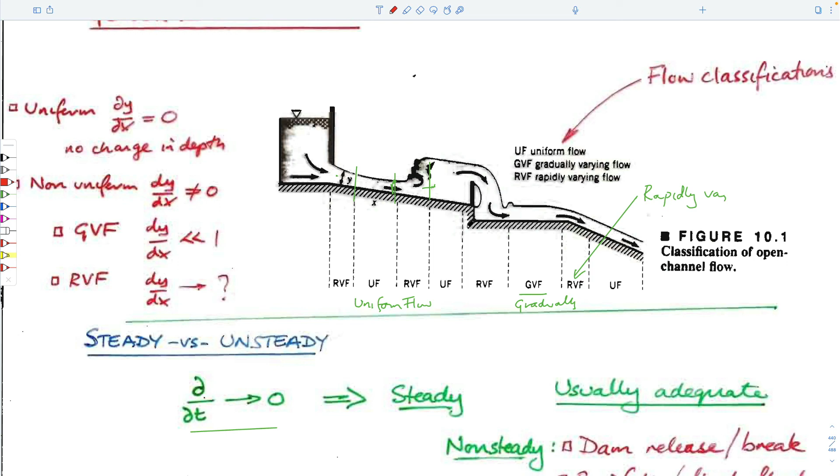So that closes off what we've talked about in terms of uniform flows. What we'll talk about for the rest of the time is how we distinguish what's going on in more interesting flow cases. For those who came in a little late, we'll talk about the rationale of how, when flow goes from upstream to downstream, you could imagine sitting on top of your kayak on this flow here.

It's going very quickly downstream, quite placid, over a small cross-sectional area. The cross-sectional flow area is much larger here. If we're not accumulating fluid - and we aren't, because if you take a snapshot now and then another snapshot later, it looks exactly the same between upstream and downstream - then what is it that causes this to happen? Going from very fast across a very small cross-section to much slower across a much bigger cross-section.

We'll find out that this is indexed in terms of the Froude number, which is the ratio of inertial forces to gravity forces. It really comes down to the fact that if you're sending information upstream, that information has to travel at the speed of the wave, the celerity of the wave. If flow is faster than that celerity wave, then the information can't get upstream to tell it exactly what it's doing. It sounds complicated, but we'll deal with it.

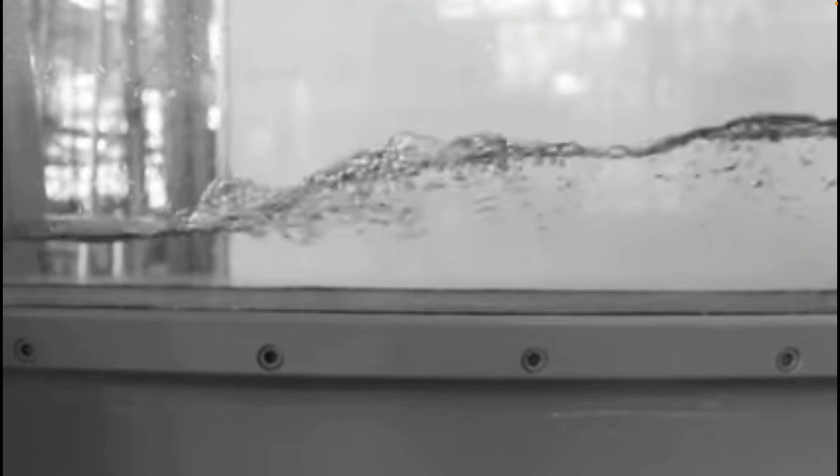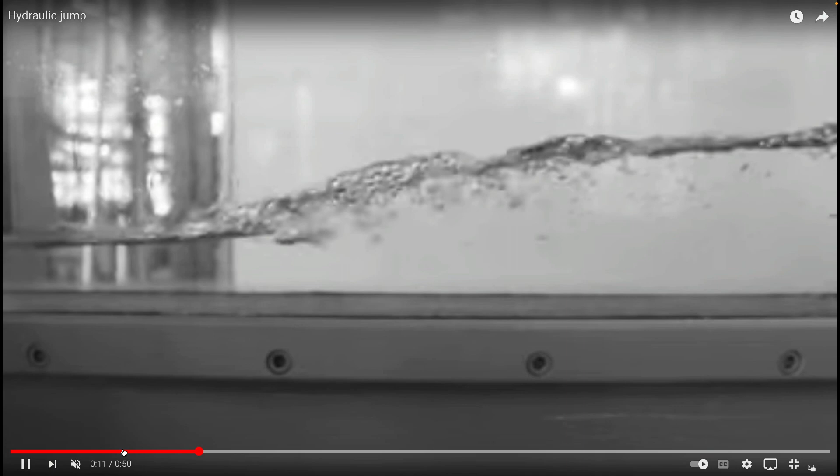So the wave speed of the surface wave in transmitting information about what's going on downstream to upstream is an important feature. It's a bit like a Mach cone around an aircraft going through the sound barrier - the energy tries to get away from the nose of the plane, but can only travel at the speed of sound in air. If the plane is going faster than the speed of sound, physically that energy can't get away from the nose of the plane. That's why people worried, in the days of looking at going through the sound barrier, what kind of forces were applied on flight structures, because the energy can't physically get away from the plane when it's going faster than the speed of sound, which would dissipate that energy away from the nose. These flows are a bit like that. So that's it.